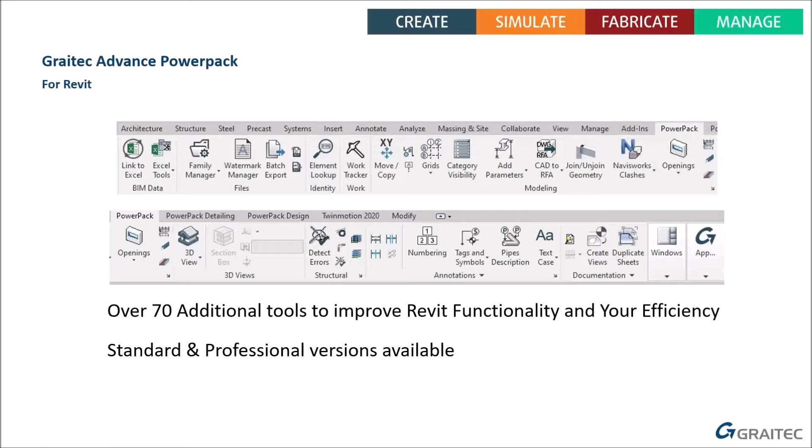Now, sometimes you may click on a certain tool, and if it does nothing, it doesn't mean that it's broken. It means that it's one of the tools that is available from our professional version. So the single installation provides you with both the standard and the professional installation. And if you speak to your local representatives, they'll be able to help you out with some of the enhanced tools that we have on the PowerPack.

When you install the PowerPack, it is bi-versional. In other words, the latest PowerPack will work on both Revit 2020 and 2021. Of course, there's a good chance you may still be using older versions because of project commitments, and we've got older versions available as well.

The question is, with these older versions, where do you get them from? There are quite a few places where we can send you a link, but one of the easiest is directly from the Graitec Advance webpage.

This is what the page looks like when you get to it. You can scroll down and this is what you'll see. You'll see various versions, and over on the right hand side we have our download options, plus some filters as well.

Over here it says select product, and as you can see we have PowerPacks for quite a different set of tools you may need: Advance Steel, Workshop, Advance Concrete, Inventor. You could choose the particular one you're looking for. We're looking at the Revit one, and once you've chosen the PowerPack you need, you can further filter to the particular version you're looking for, then get to the download.

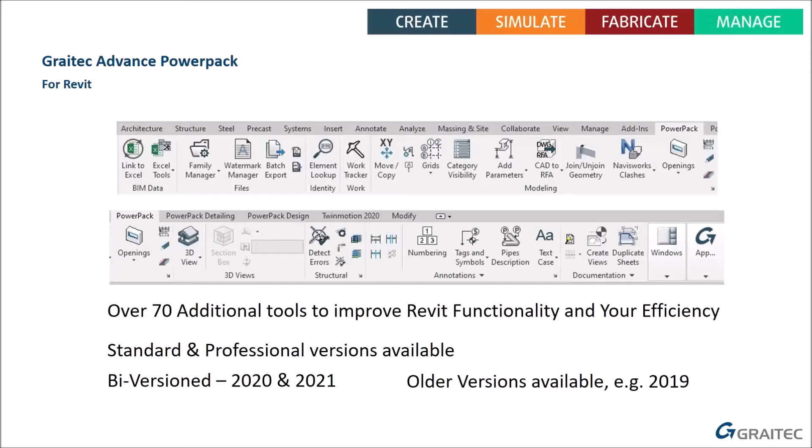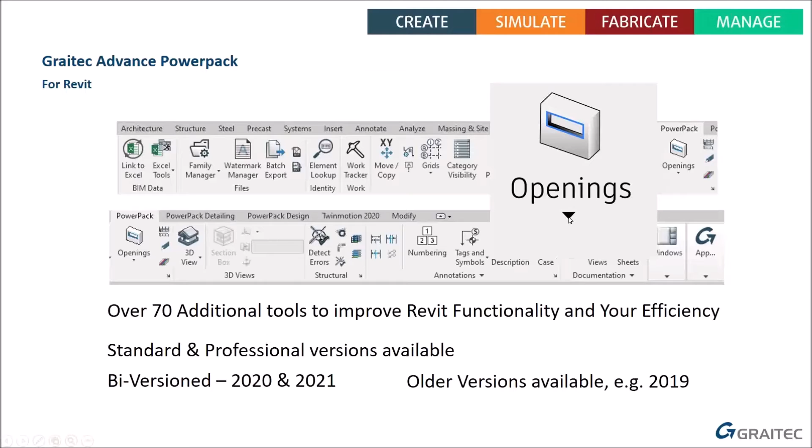Let's get back to the PowerPack itself. In this tutorial, we're going to be taking a look at this openings tool. There's a drop down available showing different options, and when you click on it you'll see three tools. Let's look at those in more detail and go live over into Revit.

Just bear with me for a moment and we'll go live into Revit. I'm running the very latest version of Revit 2021, and I've got a very simple drawing on screen where we are looking at a building.

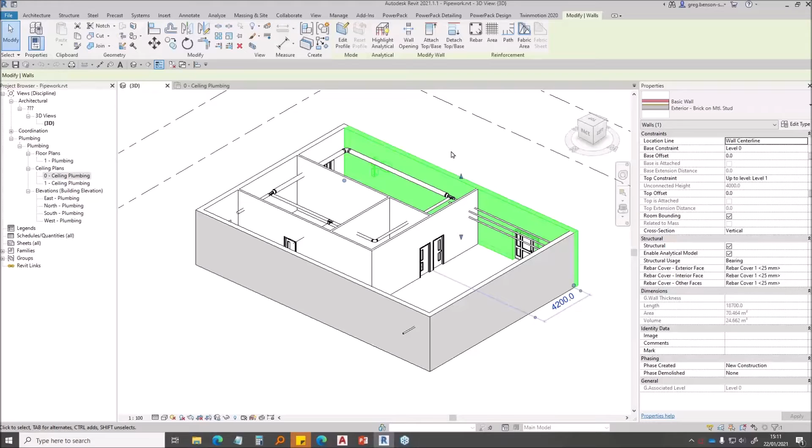Now these walls are just standard architectural basic walls. So these could be basic walls or they could have been structural walls as well. No matter whether it's from a structural side or the architectural side, the tools we're going to look at will work with both sets. These tools are very straightforward, so this shouldn't take too long.

Now, here I've got a series of pipes. This one's particularly about pipe work, but these tools work equally well for ductwork, cable trays, all sorts. Let's see what it does.

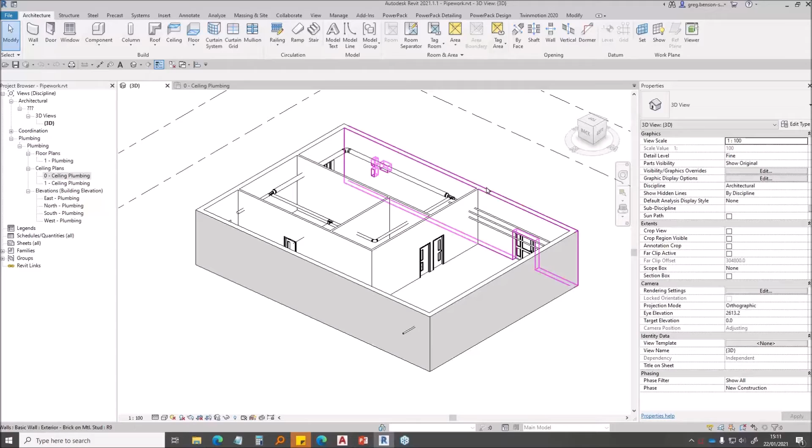The purpose of this is that when you start running systems through a building, they actually just pass through. If I put this into shaded mode, it might be a bit more obvious: your pipes and ductwork just pass through the walls. There's no actual holes as such. So in Revit, you need to indicate that there's going to be an opening to allow that service to pass through.

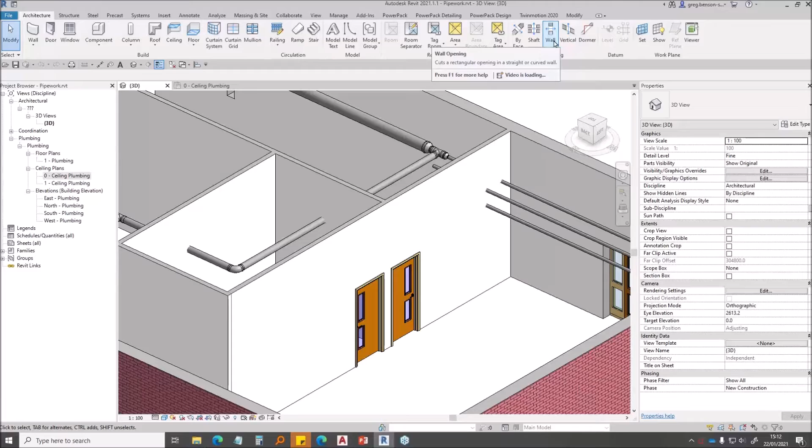From Revit, you could use these opening tools here, the wall opening tool, and you'd have to go around and do these one by one. Obviously on a big project that could take some time, and even on a smaller project it's a little time consuming. This is where the PowerPack comes in.

If we go to the PowerPack, here it is. You can see I've got a number of PowerPacks installed, and we are looking at this openings tool. Let's see how it works.

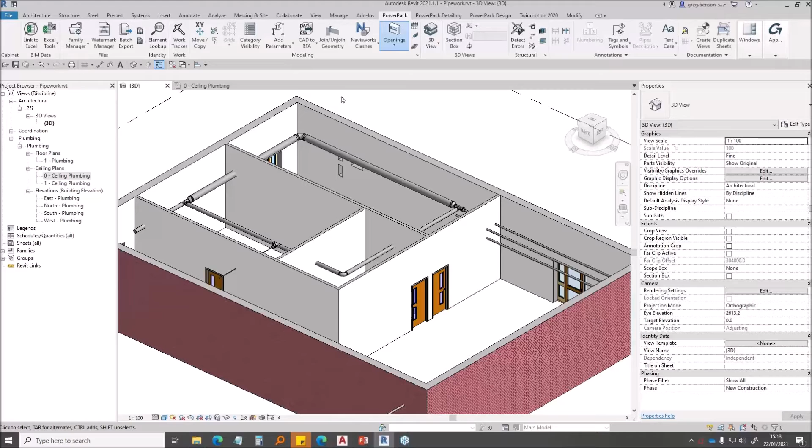We'll use the drop down, and the first one we're going to look at is this pipe openings tool. They called it pipe openings, but it's really just openings. So go ahead and click on it. Now it's going to start analyzing this building, and it's going to find all of those pipes. Here we go.

So it's found all the pipes. How many have we got? We've got 9 pipes in here. It looks around and figures out what the shape is, the dimension, and what kind of wall.

Now here you have a choice: what kind of opening do you want? You could have it governed by the type of element, the shape. You could specify round, or you could specify rectangular. Of course, you're not only going to want a hole through it, but you probably want a gap around those holes as well. So we have offset values in here, and you can certainly customize these offset values to your own preference.

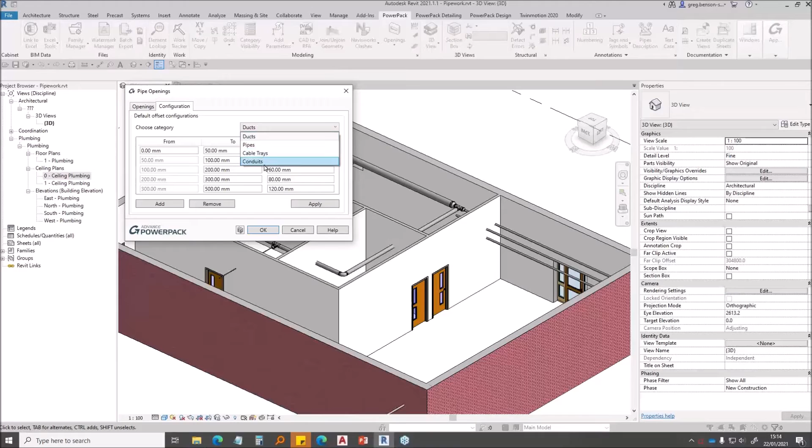Let's have a look at the configuration. So there are further tools on here, and as you can see, we could have ducts, pipes, cable trays, or conduits. So it's very flexible. But that's basically it - you can set these up, and then all you have to do is click OK.

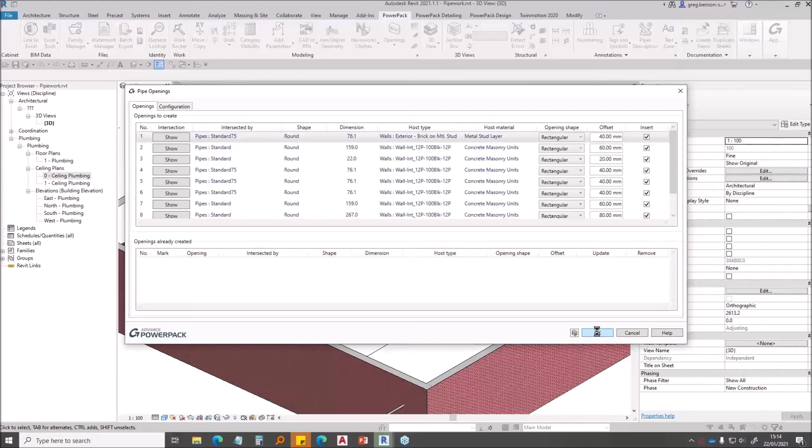Let's see what it does. You'll see a number of little screens pop up while it's processing the information, and it's loading in some voids. There we are, look at this. There you go - we now have holes for our services to pass through, with a suitable gap around each one. That's it, it really is that simple. You just click on the button and let it do its thing.

So what are the other tools on here? The other tools help you where you have actually used the Revit opening tools and perhaps want to tidy some up. I'm just going to spin this around.

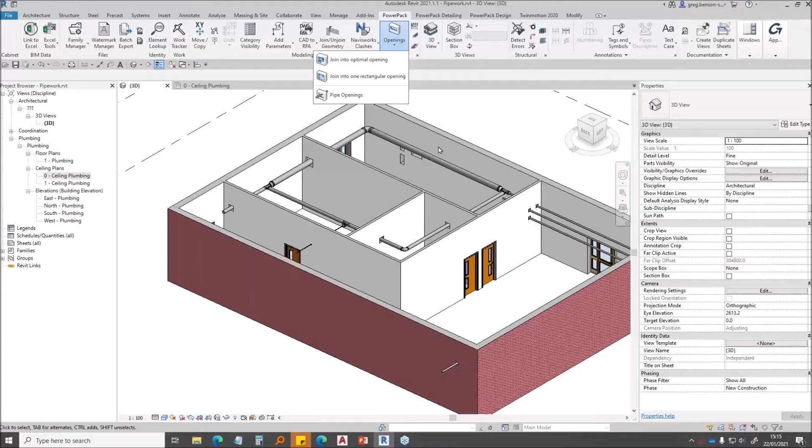So here I have some standard Revit openings in these walls. It could be that you put a number through for various services, and perhaps it's more practical if it was just maybe one hole.

Using this opening tool, we can choose what we want to do. You could have one rectangular opening, and you can see from the tooltip what it will do. If I click on here, I can then select those openings. I'm just going to select these two.

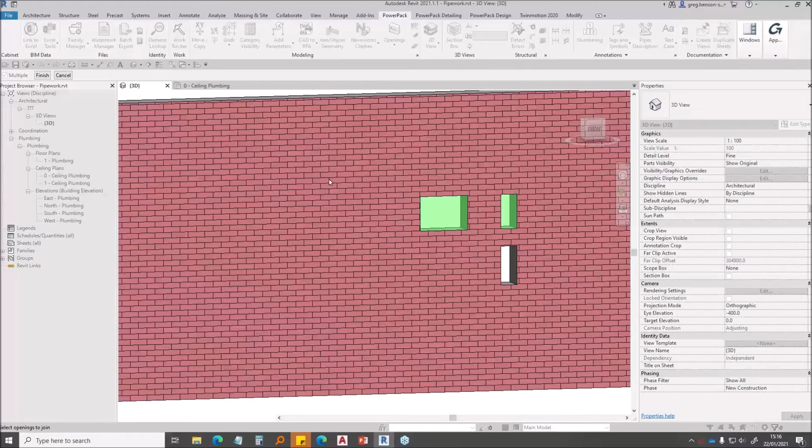Notice there's a plus symbol next to my cursor. So I'm going to choose just those two on this instance, and then in the options bar, we finish the process by clicking the Finish button. There we go, it just rationalizes those and puts them in place. I'm going to undo that.

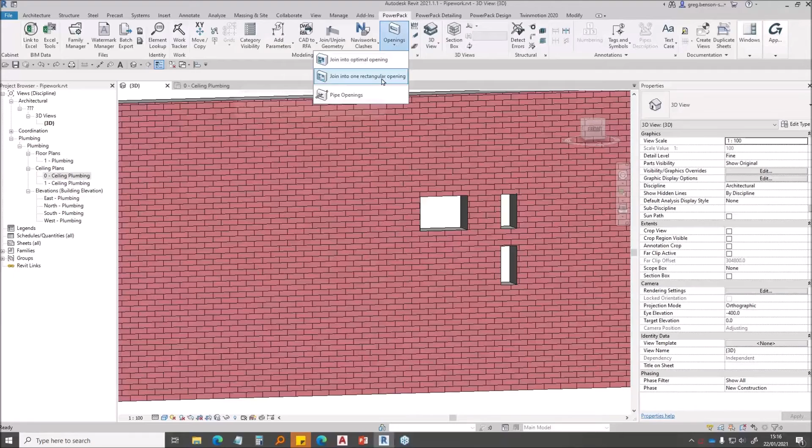So we're back to the three holes. Let's have a look at this other one. That will always produce a rectangle, so if I had chosen all three of these holes, we would have ended up with a large rectangle.

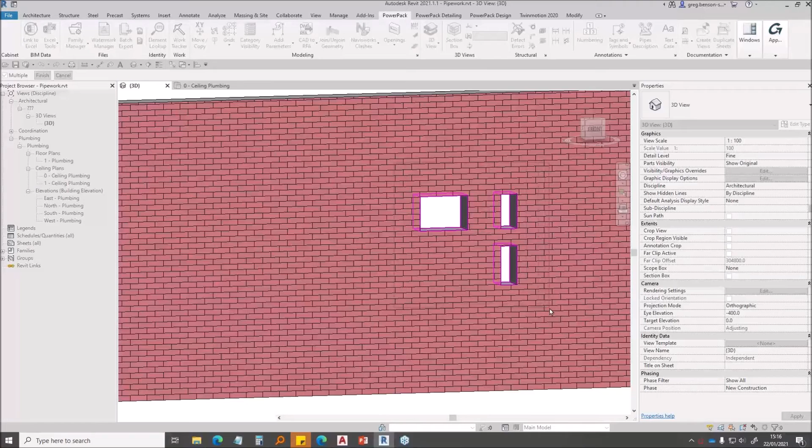Now we have another one, join into optimal opening. Let's see what happens when we try that. Click on that tool. Again we select the openings - I could actually drag a window around them as well, like so. And then do Finish, and let's see what this does.

This is the optimal version. There we are, so now it's more of a polygonal style shape, and voila, your openings are done. So that is the openings tool - it is as simple as that.

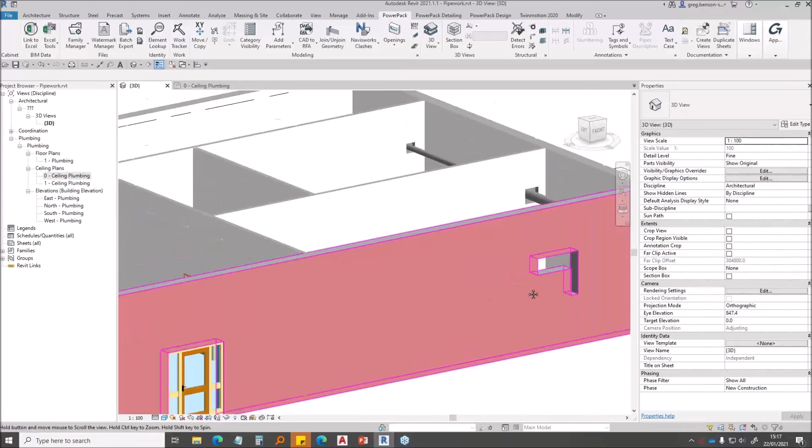Just a few other little add-on extras that might be useful to you. Now, the tools we have on the PowerPack, you can customize which ones you see and which you don't. If I come over to this big G and down to the PowerPack option, at the bottom of this dropdown we've got PowerPack Customization.

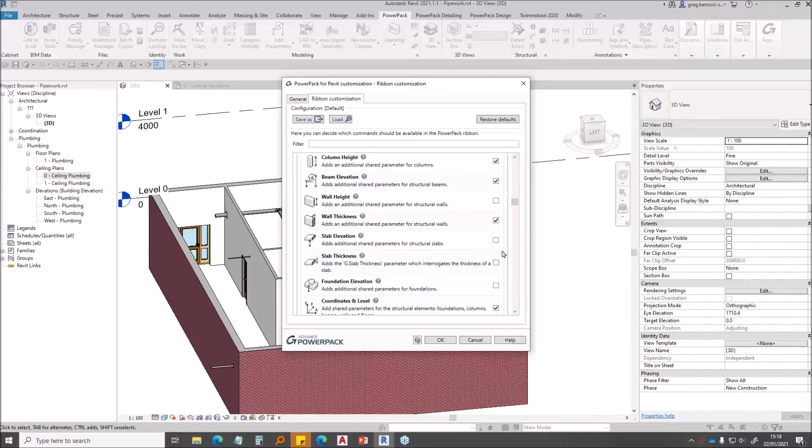One last thing - as you're aware, Revit supports keyboard shortcuts. If I hover over Wall, the tooltip shows me the keyboard shortcut is WA, and Door is DR. Now with the PowerPack tools, if there's some you want to use, you can add your own keyboard shortcuts as well. So for pipe openings, for example, there's no tooltip keyboard shortcut being displayed because there is no shortcut at the moment.

But let's see if we can add one for the pipe openings. If we go to View, the User Interface dropdown, right down the bottom you can find your keyboard shortcuts - there's a number of places you can get to this. Okay, so let's have a look at openings. There we go, openings, and this confirms over here that it's on the PowerPack.

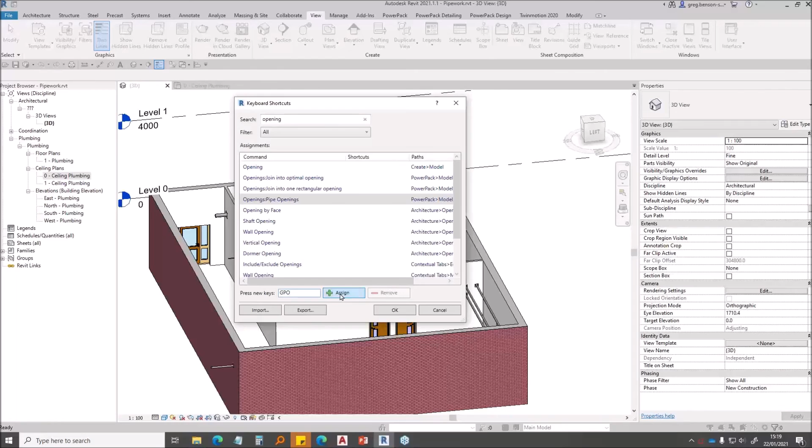Okay, so let's try and add a keyboard shortcut. I'm going to put a G in front there just to say Graitec, and then let's say PO, and assign it. So GPO - there we go, it's added it here. So let's see how that affects the actual PowerPack tool itself.

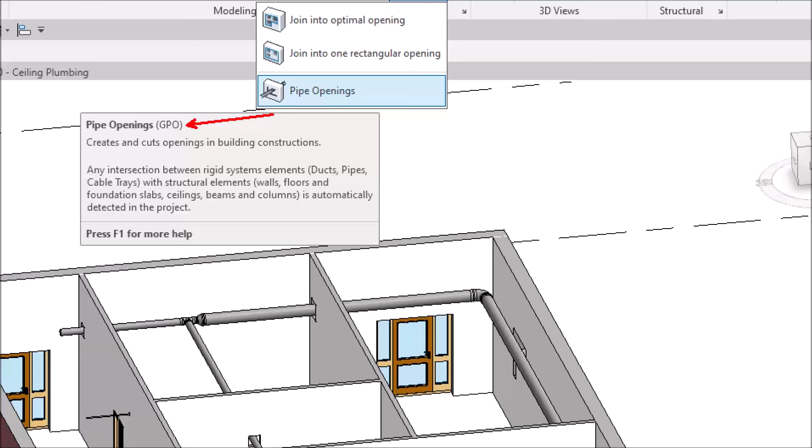Let's go back to our PowerPack, openings dropdown. Let's let the tooltip open up and look at that. Yeah, there it is - so you can add your own preferred keyboard shortcuts to the PowerPack tools as well.

One last thing - if you need some help with these, if I hover over this and let the tooltip open up, as with most tooltips it says press F1. Now you may expect that pressing F1 opens the Autodesk help pages, but this is a Graitec PowerPack, so while I'm hovering over this, I'm going to press F1 now. Let's see what it does.

Look at that, it actually goes to the PowerPack page. And then in there you can look at the index, or do a search, and it will go straight to it so you can find it. Some of these tools may actually take you directly to it. So let's try another one, like wall thickness for example - let's do F1 on there. There we go, this goes directly to the wall thickness one.

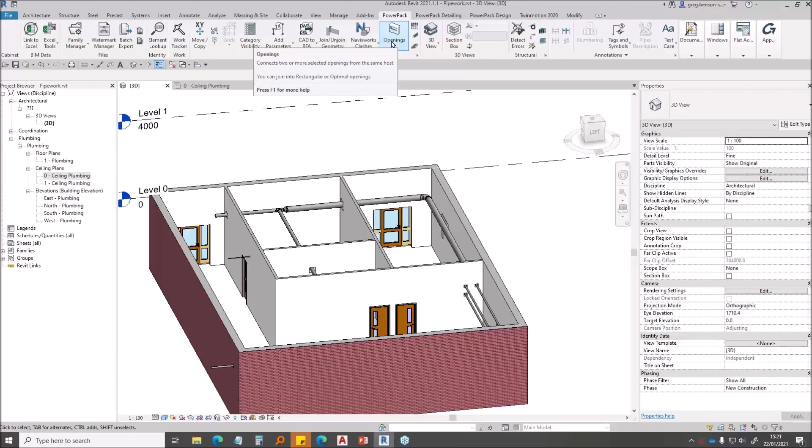So lots of help available, not only from us, but from our help pages live on the web 24/7 as well. Okay, so that is the openings tool - nice, quick, short one, but very, very useful, a great time saver.